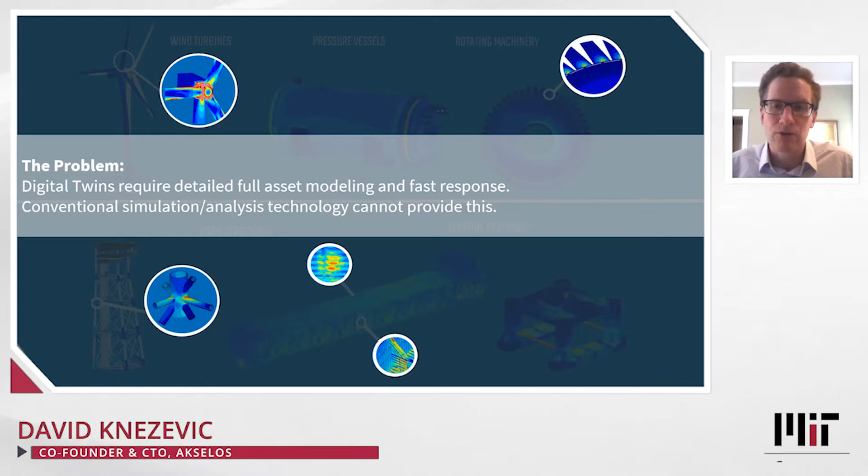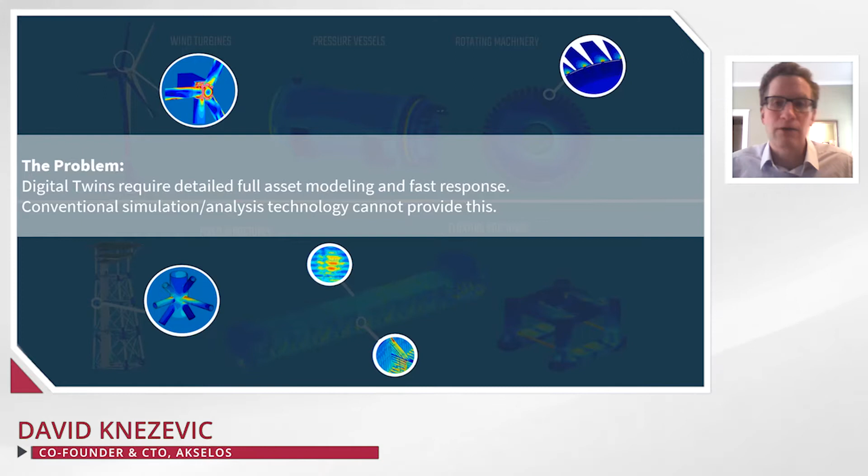Let me get into the specifics of our technology in more detail. The problem we are tackling is that operators of critical systems often lack insight into how to operate them, because they're very complex and undergo many different situations during real operations. The traditional way to deal with this is detailed physics-based simulations, but conventional simulation technology isn't up to the task of detailed physics-based modeling of critical assets during operations. Conventional simulation technology like finite element analysis, or FEA, is very computationally intensive, so it can only be applied to parts of assets, not the full system, and it's not fast enough to give insights during operations.

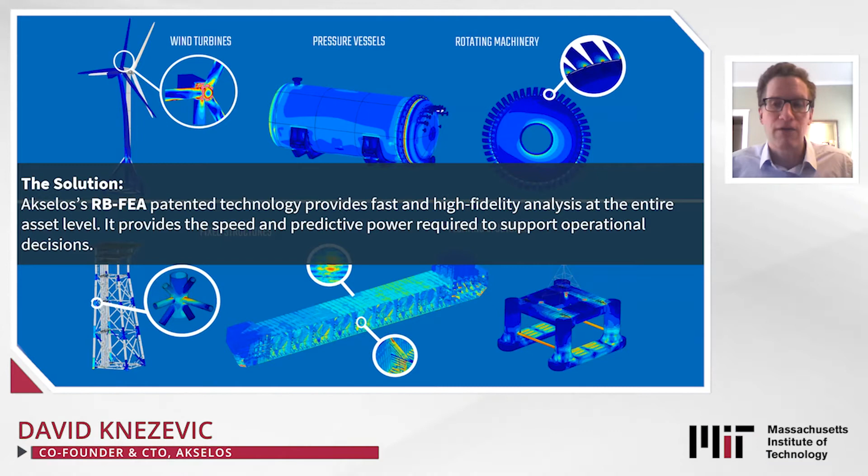The solution Akselos provides is a new type of simulation technology we call RB-FEA, which is an acceleration and scale-up layer on top of the conventional approach. This is a patented technology developed at MIT, which is why Akselos is a spin-off from MIT. This enables detailed, fast analysis at the asset level—the entire system level. So instead of just zooming in on small parts of these critical assets, we get the full asset in view, and we get integrity data of the whole system.

It's set up in a way that can bring in data—sensor data, inspection data comes into these models, they get reanalyzed, and you quickly get an assessment of the entire system. This brings the speed and predictive power to support operational decisions when dealing with critical systems.

We've worked in many different industries, and here I'll show a couple of examples that I think would speak to the water infrastructure industry.

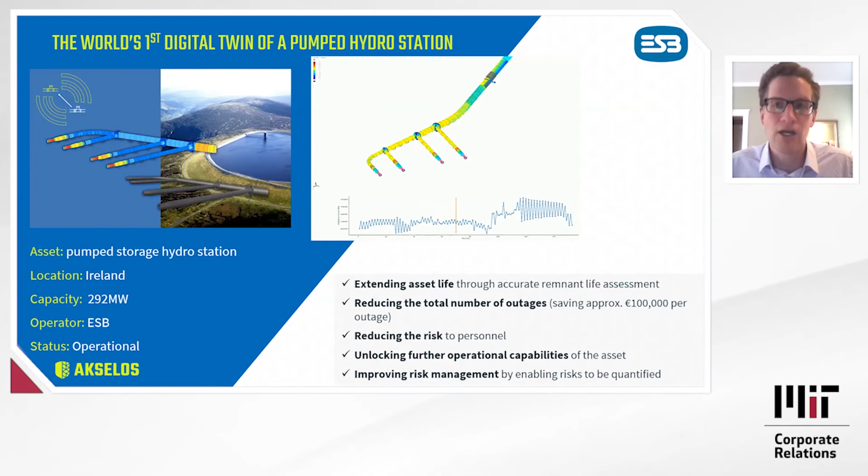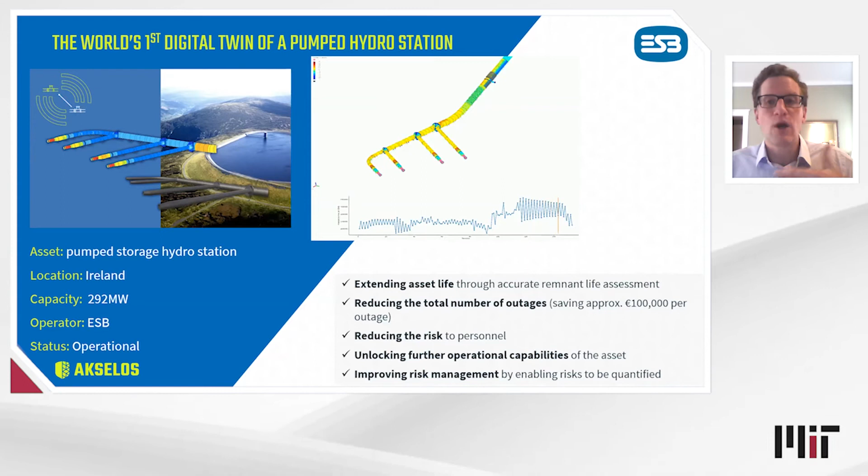The first is what we're calling the world's first digital twin of a pumped hydro station. This is a system in Ireland operated by ESB. It's essentially a pipe-like system connecting two lakes, used to pump water up when you've got excess energy, and let it come down when you want to use that energy. This is extremely valuable, even more so than ever, with the extensive renewable usage that's growing all the time. The operation of this asset has changed a lot due to increased wind and solar being deployed in Ireland. This led to ESB deploying an Akselos digital twin of this system.

You can see there's sensor data being tracked here. Every time you get a new sensor reading, you get a new stress profile. This all gets post-processed to give fatigue and strength and critical integrity checks, allowing the operator to understand how they can cycle this system in a way they never had the insight to do predictively before. Ultimately, this leads to a reduced number of outages, reducing risk to personnel, and unlocking further operational capabilities—so many valuable outcomes from this structural digital twin of this asset.

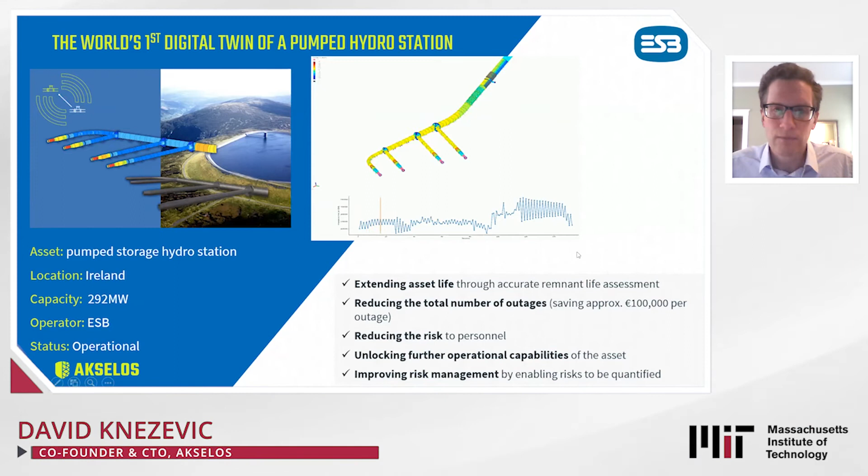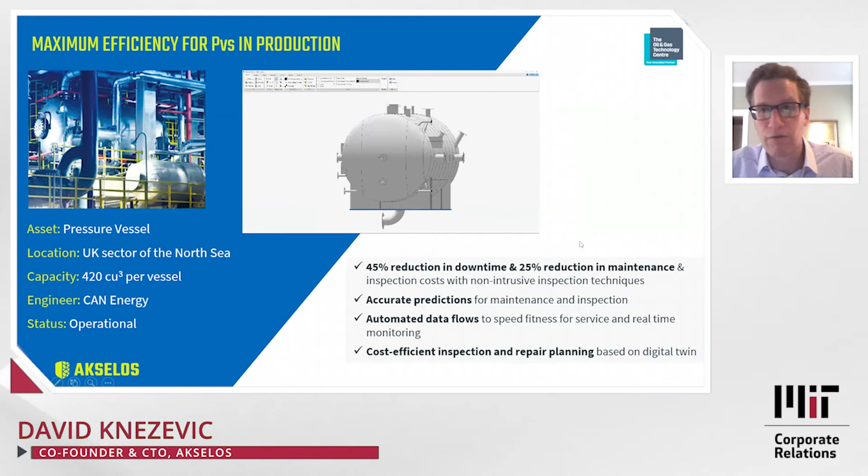Another example shown here is a pressure vessel. I would think there are similar examples in the water infrastructure industry of pressure equipment—we also deal with pumps, for example. But here you see an example of a detailed Akselos RB-FEA digital twin of a pressure vessel.

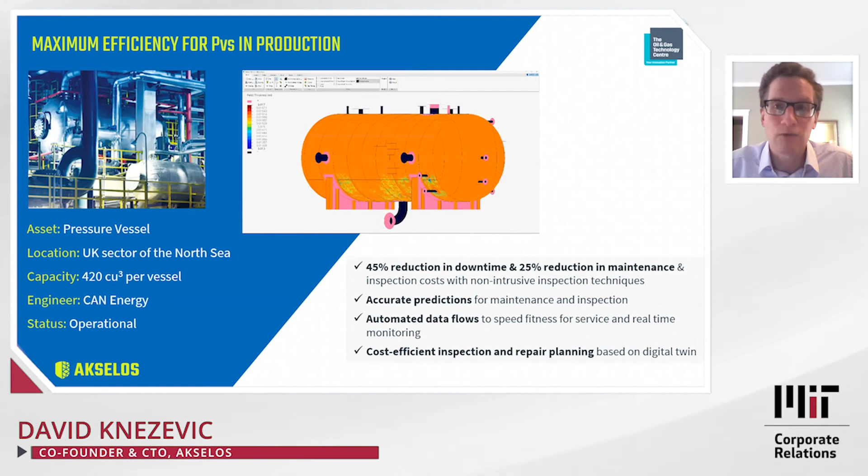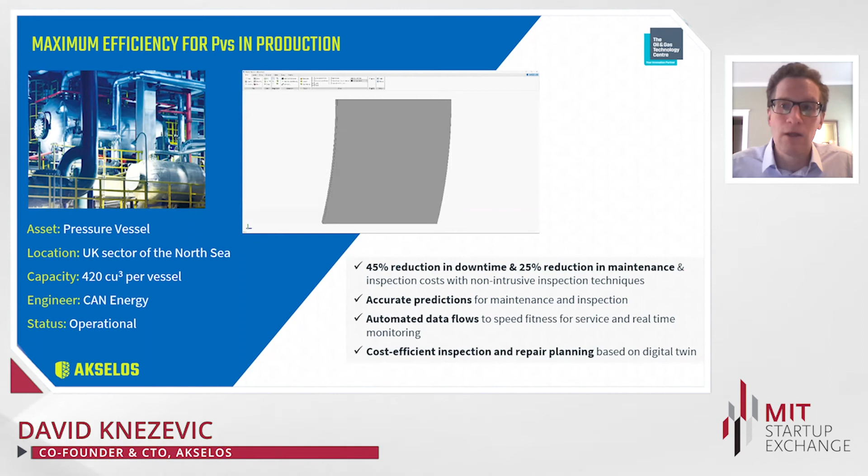What's really special about this is you can see these color profiles, which include inspection data—data coming from laser scans of this asset. All that data gets incorporated into the model, and then it gets analyzed. So you get stress profiles, condition checks, so you understand whether this asset in its current state and operating regime is safe, or what you need to do to it, and how to rank risk across various assets in your portfolio.

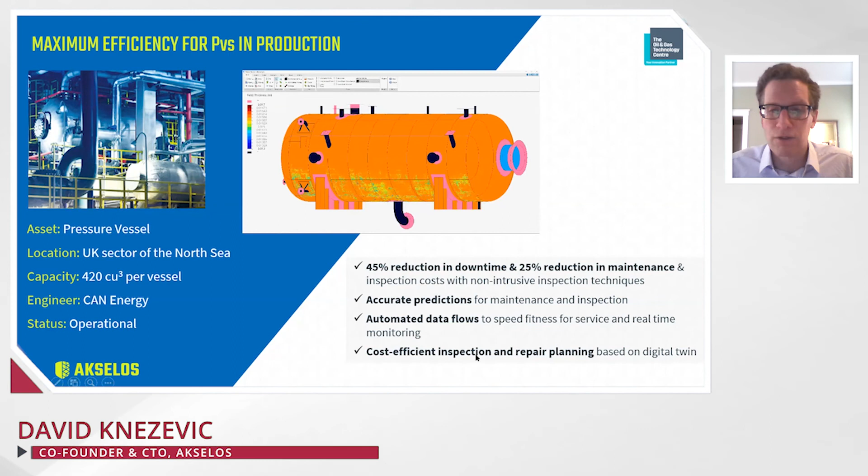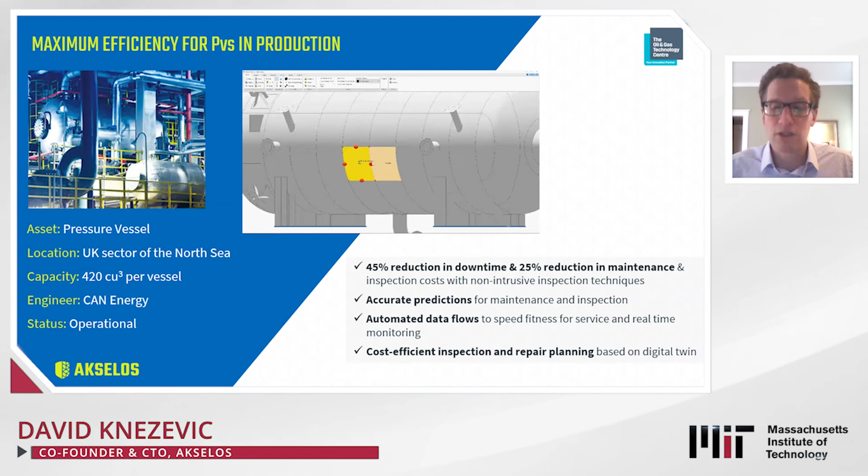This leads to accurate predictions for maintenance and inspection, cost-efficient inspection and repair planning, and reductions in downtime and maintenance. These are the types of outcomes from deploying this kind of digital twin, and in particular connecting it to inspection and sensor data. There's many things you can do with this type of technology—I think the key is deploying predictive physics-based modeling on assets and using that in operations.